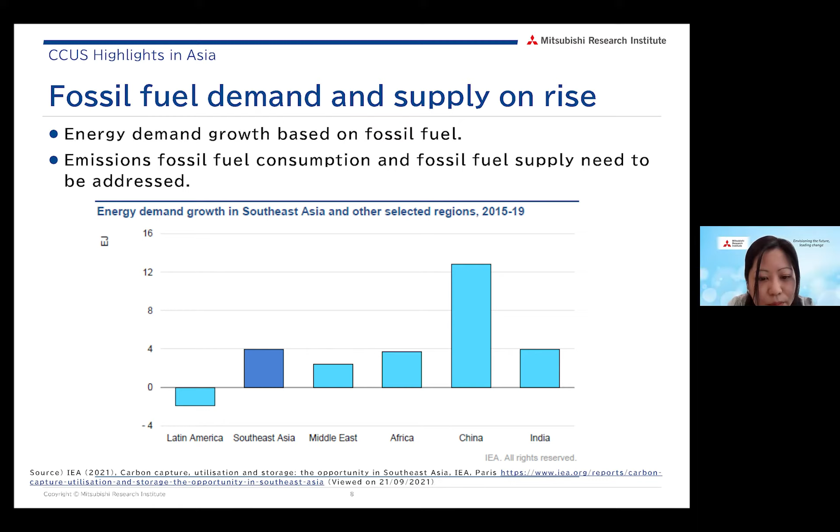And as you can see in the graph here, the energy demand growth in Southeast Asia is very high. It's just after China. And for potential solutions in introducing CCUS, IEA has proposed three main solutions. One is the integration with zero emission power, basically providing CCS retrofit for existing fossil fuel power plants to provide flexibility for a renewable dominated grid.

As many of you are aware, the more renewable energy is introduced to the grid, the more flexibility is needed from other sources, such as fossil fuel power plants using natural gas. So the importance of fossil fuel power plants with CCS is expected to grow in the grid to coexist with renewable energy. And also, obviously, heavy industries such as cement, steel, and chemical sectors will continue to depend on fossil fuels, and providing CCS to these sectors is crucial.

And also, a number of ASEAN countries have a crucial position in the natural gas supply chain, and capturing CO2 from gas reservoirs as well as gas turbines in these areas is also important. And the cost for CCUS is higher, but comparatively to other options such as using hydrogen as an alternative fuel, it is still lower.

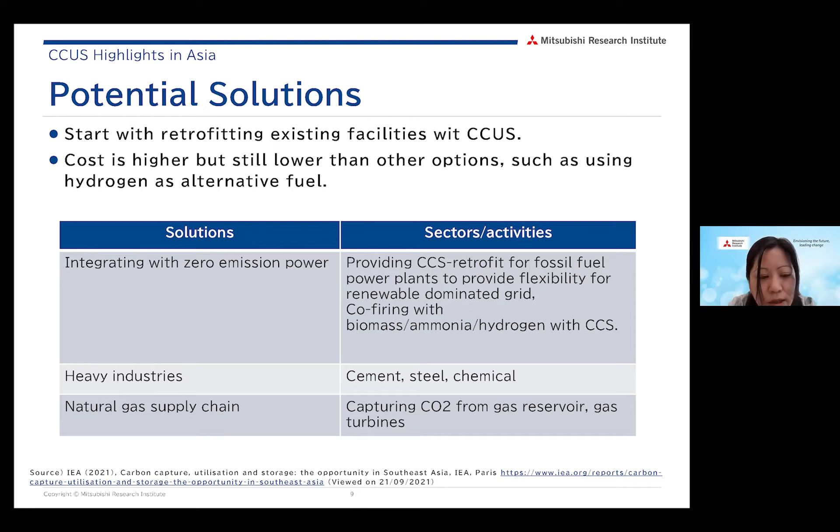And I would just also like to give a brief overview of various CCUS technologies available today. They're at varying maturity stages in terms of technology development. And I'm very happy that we have two speakers with expertise in the carbon capture area. I'm looking forward to hearing their lectures so we can learn the technical contents of each technology, as well as advantages, disadvantages, and how they can be applied to the Southeast Asian context.

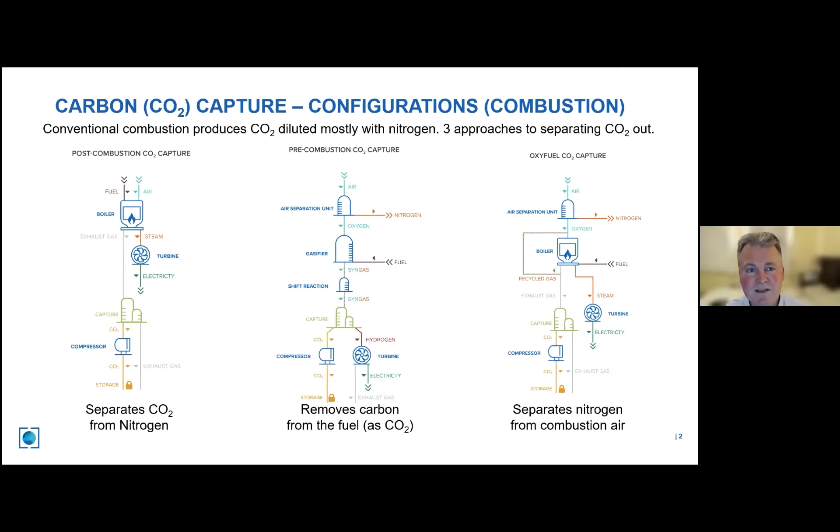So that's combustion processes, but that's not the end of the story. There's also industrial configurations. So a classic one, and in fact, a very widely deployed one globally at the moment, is in natural gas processing. So raw natural gas, as it comes out of the ground, often contains quite a bit of CO2 mixed up with the methane that we want. And those facilities already have what are known as acid gas removal units. So acid gas removal is removing CO2 and sulfur compounds, typically hydrogen sulfide.

The nice thing about natural gas capture is that this step is being done anyway in most of these natural gas processing plants. CO2 has to be removed as a matter of course in processing natural gas. And therefore CCS is easier in this case because a lot of the hard work has already been done. It's more a matter of compression, dehydration, transport and storage of the CO2, given that the capture's already been done.

Another example is cement production. So cement is the production of calcium oxide, Portland cement. We produce that from a raw meal, which is typically a calcium carbonate material or some other carbonate material. We heat it and that releases CO2. So this is not a combustion reaction. This is CO2 as a fundamental chemical reaction occurring when we make cement.

That CO2 is unavoidable. So even if we switched the heat source in cement production to a fully renewable source like biomass, we would still produce quite a lot of CO2; typically of the order of 50 to 60% of the CO2 produced in cement plants comes from the actual reaction itself. And so there's a need for CCS in that particular industry to handle that CO2 and give it an opportunity to be abated.

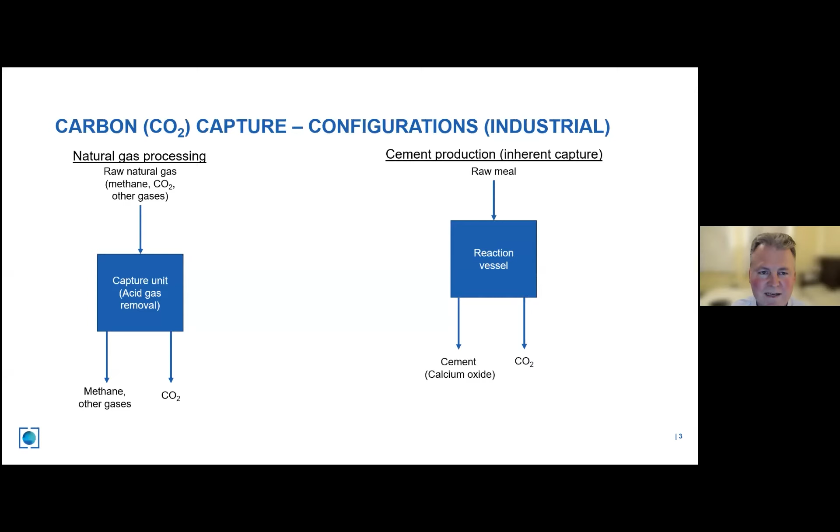And then something that's a little bit more recent, but I think is going to have a big future, is known as direct air capture of CO2. So as the name suggests, this is removal of CO2 directly from atmospheric air, so not from industrial point sources. The concept is pretty simple. You take air. Air is typically in the order of 400 parts per million, so very dilute compared to CO2 that you would find in most other point sources. You pump plenty of air through the plant and you reject air that's depleted with some of that CO2. The capture fractions are typically not huge because it's already very dilute as it is.

And I've got a couple of examples there in the pictures. One is of the recently commissioned Climeworks Orca plant in Iceland. That's a relatively small plant by CCS standards, only 4,000 tonnes per year. But as it stands, that's the largest operational direct air capture plant in the world. But coming down the line is Carbon Engineering's direct air capture process. They've got their first project in development with Oxy in the United States. And that's intended to be a 1 million tonne per year CO2 capture plant. So that's 1 million tonnes of CO2 captured directly from the air.

DAC is important because direct air capture is an opportunity for what's known as negative emissions. So it's not a reduction of emissions from some positive number to a smaller number. It's actually a negative number. There is a net reduction of CO2 in the atmosphere as a result of these processes.

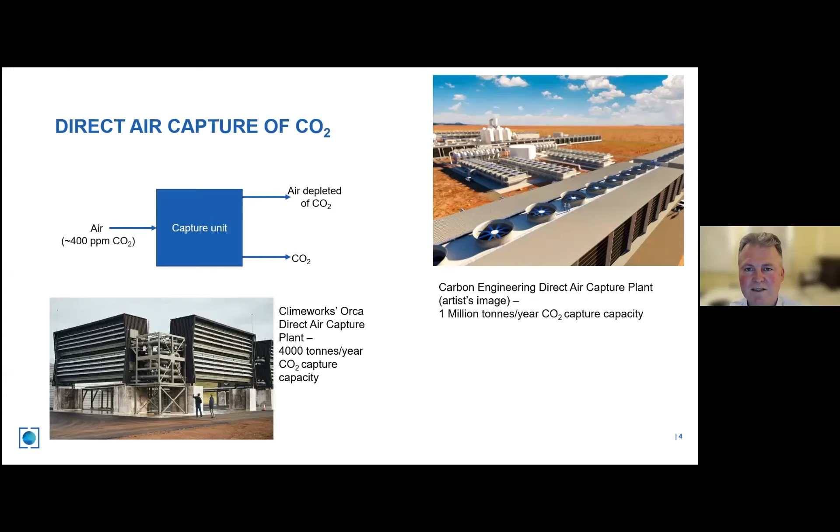I'll take you through just the general categories of the technologies that are used. The most commonly used one is absorption or solvent-based CO2 capture. They deploy the use of a solvent that has a preferential absorption of CO2 from a gas into a liquid. So solvents are typically things like amines or potassium carbonate, some physical solvents like certain glycols. There's a range of other different solvent types that are coming along.

And there's two different categories. There's the category known as chemical solvents, which not only absorb CO2, but actually react it into other chemicals, into other species within the solvent itself. That gives it a lot more capacity to keep taking on CO2 and means you can actually get a lot of CO2 absorbed into each cubic meter of that solvent.

There are also so-called physical solvents, which do absorb the CO2, but they don't react it away. So akin to how you would have CO2 in fizzy water or soft drinks. They tend to require higher operating pressures to work just because they have a lower affinity for CO2. You need more pressure to squeeze more CO2 into the solvent.

And the diagram on the right there is a fairly high level but typical arrangement that you would have for a solvent-based plant. You have what's known as an absorber. An absorber is usually a packed column where the flue gas or the gas that contains the CO2 is admitted at the bottom and flows up. And simultaneously, we put our fresh solvent in at the top and it flows down over that packing, giving it lots of contact, lots of surface area to interact with that gas. It takes up the CO2.

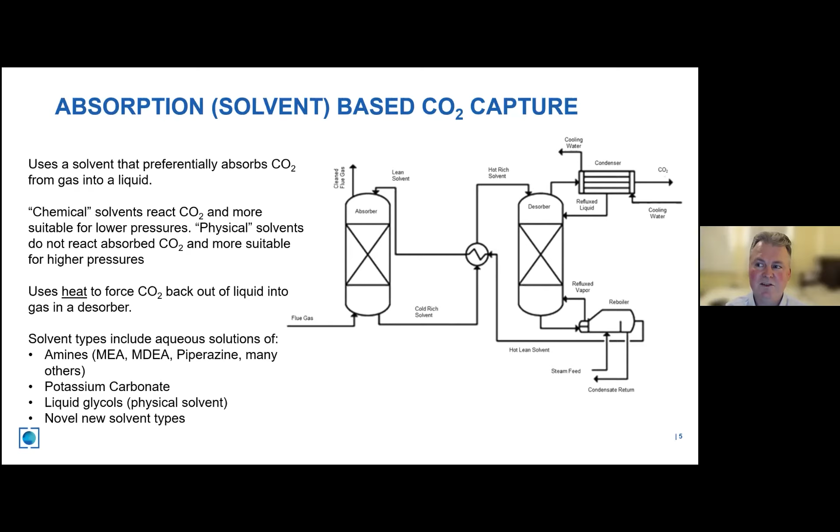And so people have been looking for more advanced types of solvents or different types of solvents that can overcome these issues and are more robust over time. Next type of technology is known as adsorption, AD, not AB, adsorption-based CO2 capture. This is where we use a solid material as opposed to a liquid. It's typically a porous solid that preferentially takes up CO2 from a gas and adsorbs it onto the surface of that solid.

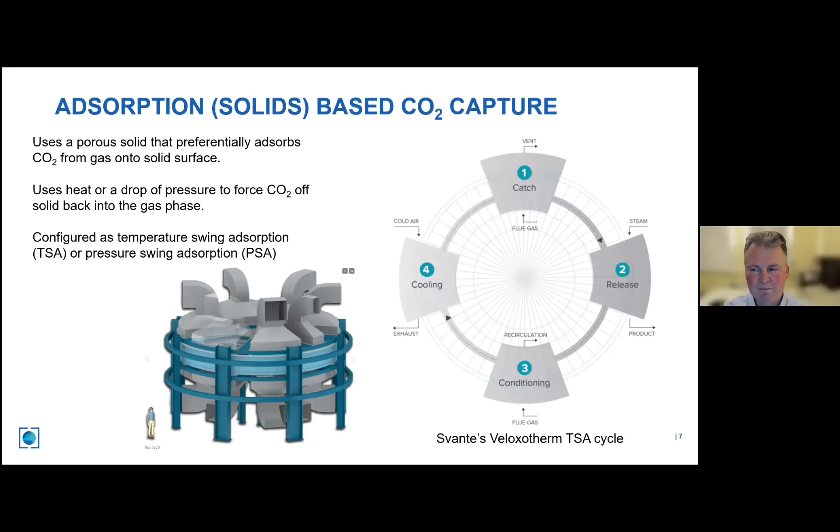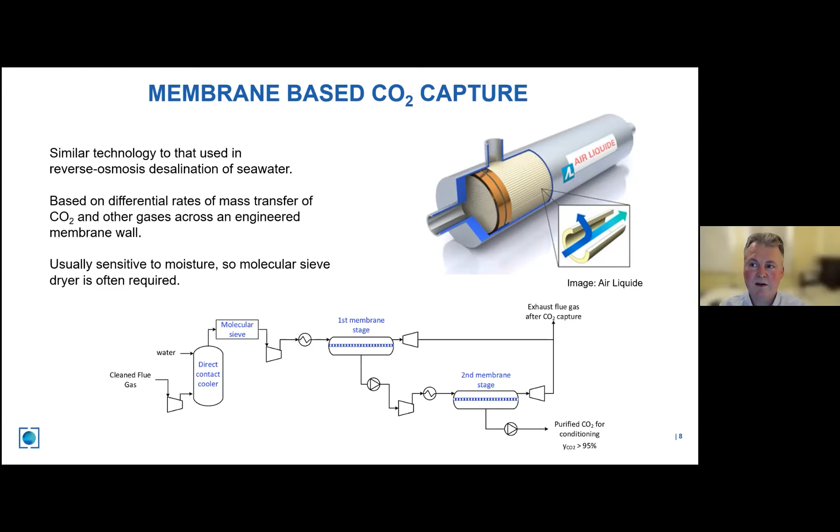And they also struggle for very, very high purity CO2. So the two-stage approach, which I mentioned on this slide here, of having a first membrane stage and second membrane stage, that could get you to 95% pure CO2, which is okay for pipeline transport. But if you wanted to liquefy your CO2, say to put on a ship, liquid CO2 typically needs to be even purer than that again, much closer to 99%. So membranes may even need a third stage if you wanted to go that pure. And a third stage would require an extra set of compressors and more energy consumption, which may lead you in that case to go to one of the other two technologies.

And the final one is that it's not so suitable for low partial pressure CO2. So partial pressure is really an analogy for concentration. It's concentration times total gas pressure. Membranes really struggle when you get down to very dilute CO2 in your feed gas. They really just can't do it very well.

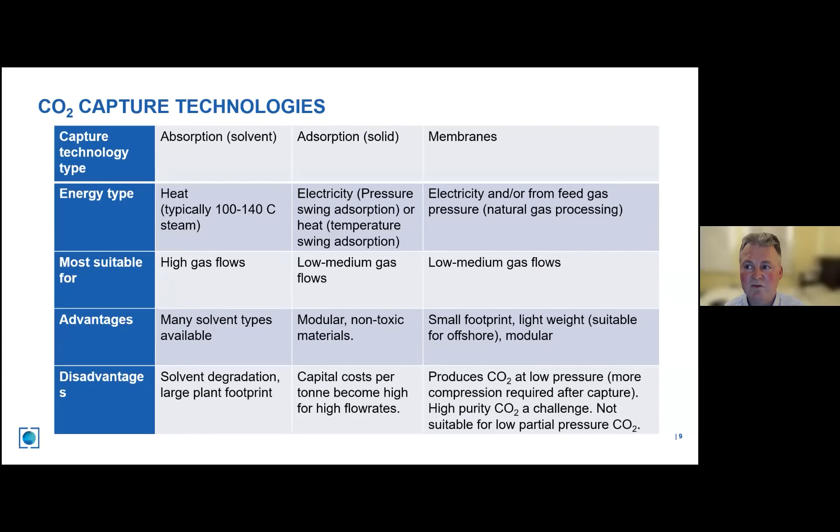We are about to release our global status of CCS report. It's coming out next week. And in that, I can't tell you the results of this year's numbers. That's embargoed until our report comes out. What I can tell you is that there has been strong growth in 2021.

We've been seeing the order of 30% year-on-year growth in the capacity of the CCS project pipeline since 2017, and it's even been accelerating in 2021. So the growth is even stronger than it was in the last few years, particularly projects entering the early development.

So I think the world's efforts to start moving towards net zero are focusing a lot of attention on getting projects started, particularly at early development, which is what we call the feasibility level of project development. And then obviously that's going to lead to more advanced development and construction projects in the future.

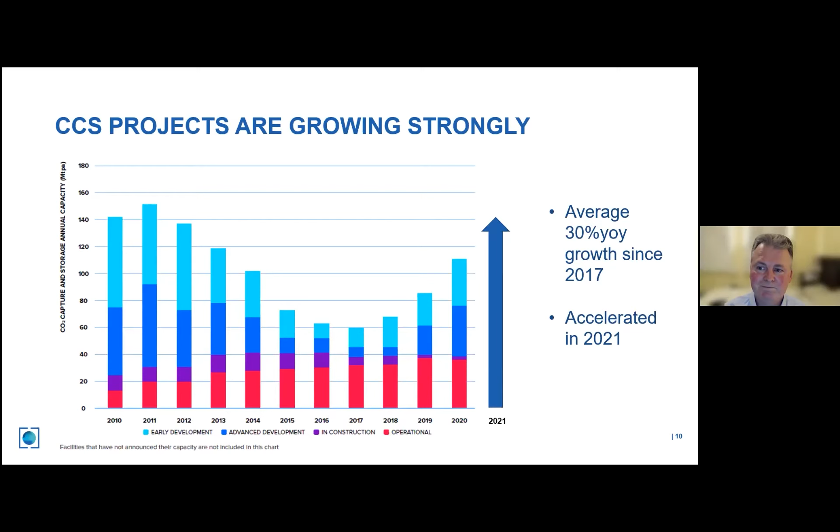In terms of the facilities that these projects are being seen in, we're now seeing them across almost every application that you might care to point to that CCS may actually be used in. So we're seeing them now in cement. So the Norcem Brevik plant in Norway is the world's first CCS project in cement. That's now under construction. We see them in iron and steel in Abu Dhabi Steelworks.

There's waste to energy applications, power generation of coal and gas types, hydrogen production. So producing hydrogen with CCS is known as blue hydrogen. And we're seeing it in chemicals, in ethanol production, fertilizers, natural gas processing. And now we're seeing projects operating in direct air capture as well. So it's really quite a diverse industry. It's not focused on any one sector.

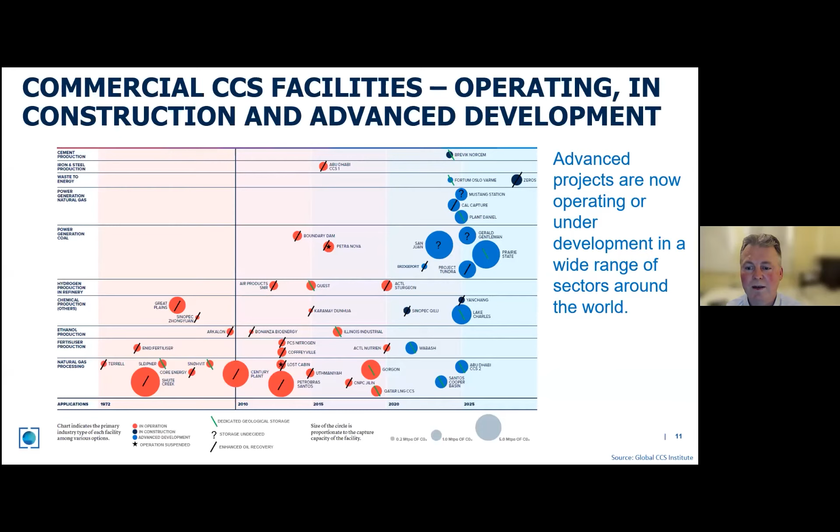It's really sort of a varied industry that really works across a range of different sectors and is giving options for decarbonisation for a range of industrial and energy sectors all over the world, where we're really seeing deployment now globally, which is very, very exciting.

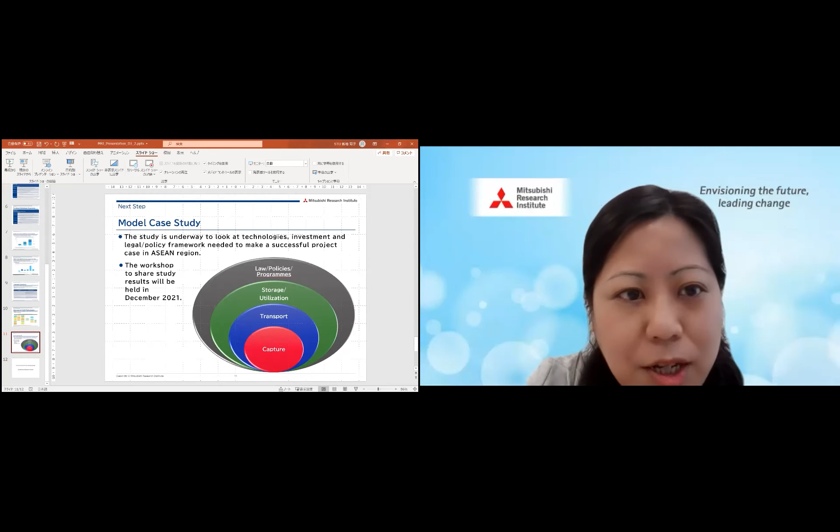I think to conclude, I would like to mention that, commissioned by ERIA, Mitsubishi Research Institute is now considering a model case study to look at available technologies, required investment, and the desired legal and policy framework that may be needed to make a successful project case in the ASEAN region. And we would like to share the outcome of this study with the audience in the workshop to be held sometime in the first half of December.